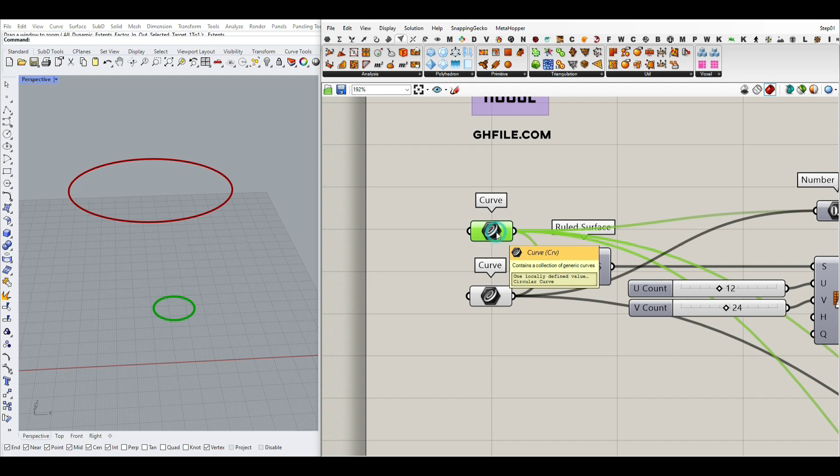To go forward, I've used the surface freeform ruled surface. If I turn this on, you can see that this is going to create a ruled surface.

Now we define the number of divisions that we want, which will give you more detail if you increase the UV division. What you have to do next is define a Kangaroo goal.

I'm going to use Kangaroo main. You can use different solvers, but I'm going to use the bouncy solver here, as you can see, which is going to give you an output.

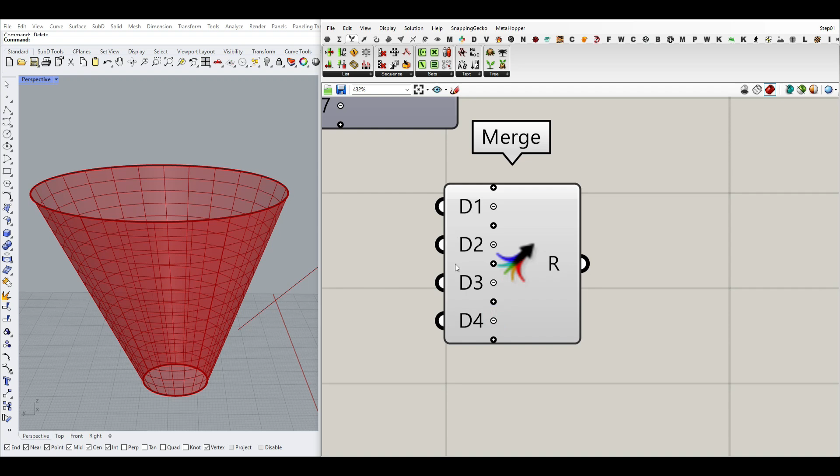We have to define the goals. I've merged all of the goals using a set tree merge. If you zoom in, you can see that you can give different inputs to the merge, and that is a good way of organizing them. So when we give it to the goal object, it's going to be one output.

The first thing I always use in the Kangaroo plugin is the Kangaroo main show. As you can see here, I've used a mesh to show. That is the first goal.

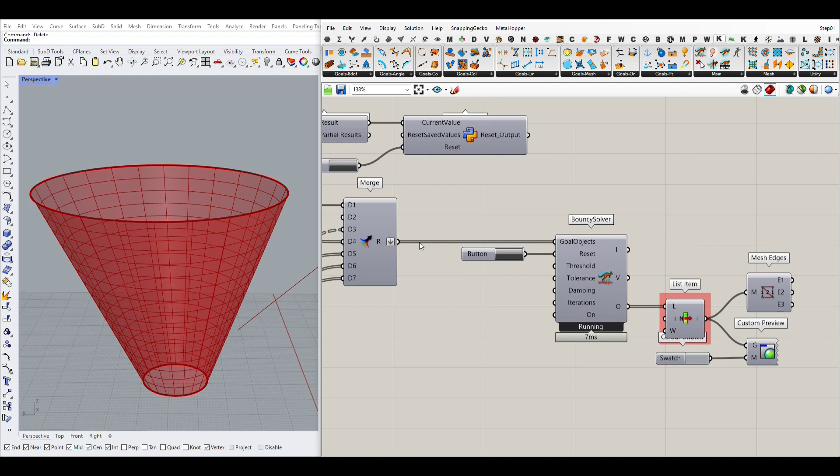The good thing about this is that when you give it to the goal object, the first output is going to be the output you want. As you can see, it's invalid here because we have too much pressure, but we can pick that up with a list item and use that as an output.

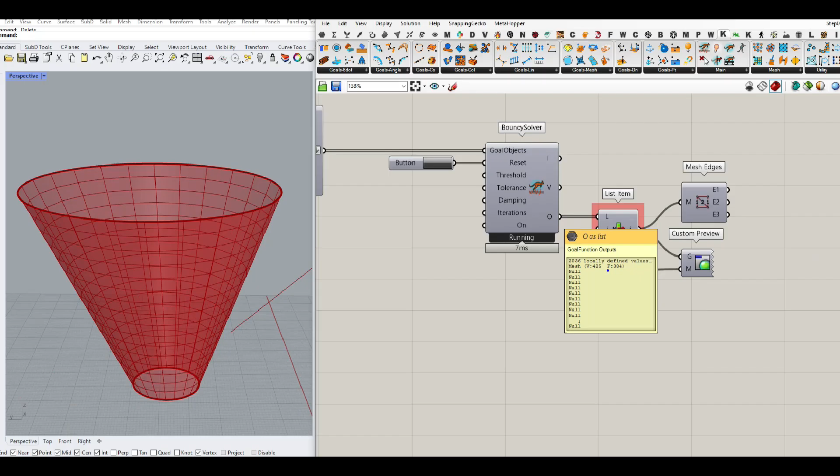Let me put this pressure to 0 and reset the simulation. Here you can see that we will have the mesh, and we can pick it up with this list item. I'm going to turn that off.

If I reset the simulation, you can see the output here. If you want the damping to be a smaller number, you can say, for example, 0.2 to 0.99, and that is going to give you a slower animation.

The number of iterations by default is 10. I'm going to give it a bigger number, for example 40. It's going to make it even faster with a smaller damping. So you can just play around with these numbers.

You can also give a toggle, a Boolean toggle, to control whether we want to run the simulation. If it's false, it's not running; if it's true, it's going to run. A good thing about this is that if you set it to false, it's going to pause the simulation.

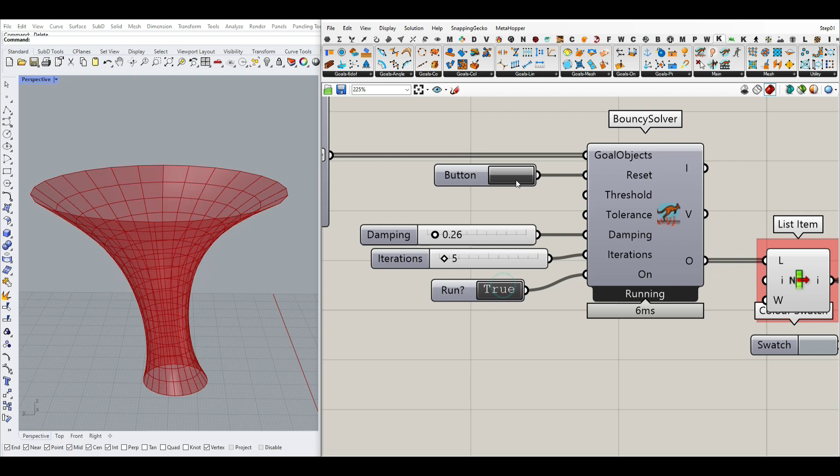Sometimes you can even use that to pick up a particular part. For example, I'm going to run this and pause it for this part. So you can do that whenever you want to get an output.

The next goal we want to define is the goals mesh, and it's going to be a load, for example vertex loads. You can just give the mesh to the input, and as you can see here, I've connected that to the mesh but set display hidden because I wanted to clean up the algorithm. If I give this a minus number, for example minus 0.1...

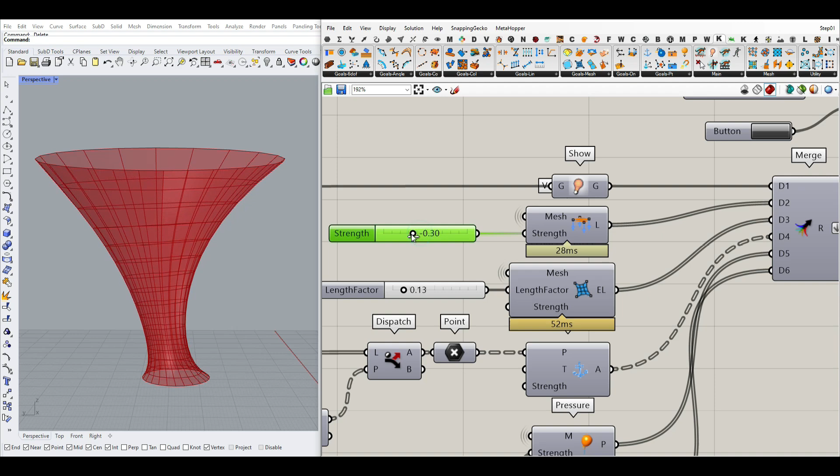...it means it actually has a weight downwards, like minus g. As you can see here, it's pulling downwards. If I increase that, it goes further down. If I give it a positive number, it's going to go up. So you can always play with that number — that is another goal we have defined.

Another thing we have to define is that this is somehow a tensile structure. So I'm going to use the goals mesh edge length, which is going to convert each of the edges of a mesh into a spring-like structure.

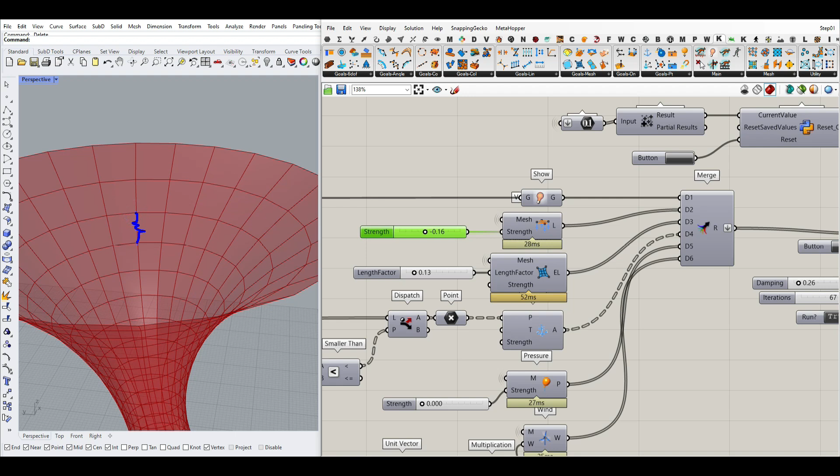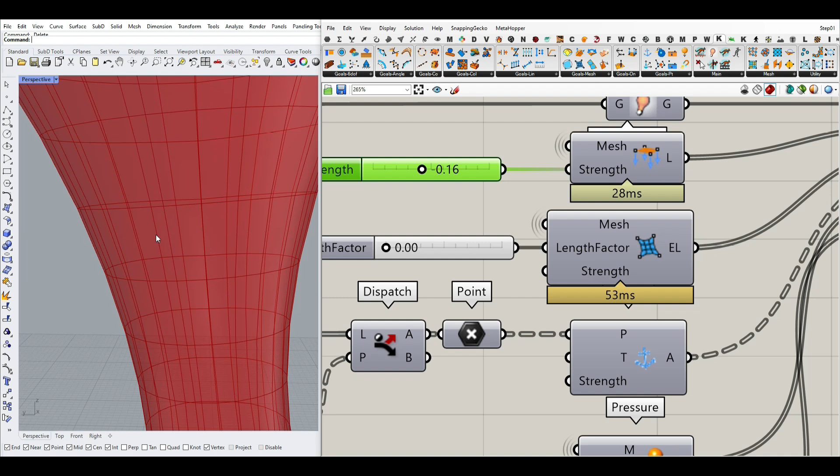Okay, so I'm going to give the mesh to the input. The length factor, you can put that to 0. It's going to actually try to make it as small as possible. 0 means it can reach a 0 length. For example, these can come into a 0 point, but it's going to break the mesh, so this is just like maximum flexibility. If you increase it to 1, it means it can't deform, and as you can see here, it's a little bit awkward as an output. So I'm going to give that also as the third goal.

Okay, the next goal we want to use from the Kangaroo plugin is the goals point anchor, and we want to fix these anchors on the ground. So as you can see here, these points from the top and bottom have to be selected and they're not going to move.

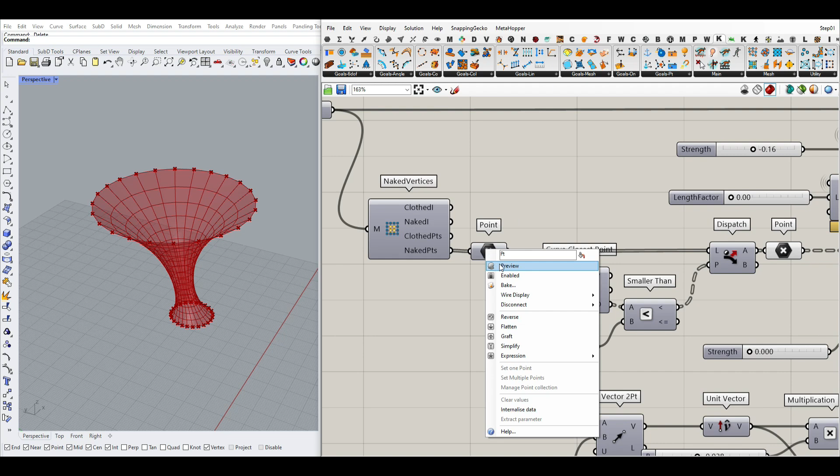Okay, to get those points, you can go to mesh and get the naked vertices of the mesh. It's going to give you naked points. As you can see here, because the surface is a little bit based on the ruled surface, it has a naked edge here, so we have to get rid of the extra points we have here.

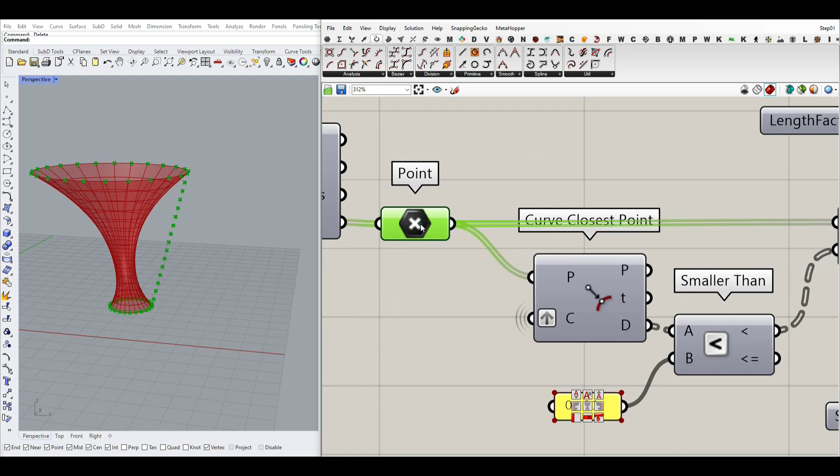What I've done here is curve analyze, and I think that curve CP here we have to use, curve closest points. We say, okay, which of those points are closest to these two curves we have from the top and bottom. I've grafted this - if you don't know about flatten or graft, you have to watch the data management sections from the Parametric course for beginners. We have talked about that.

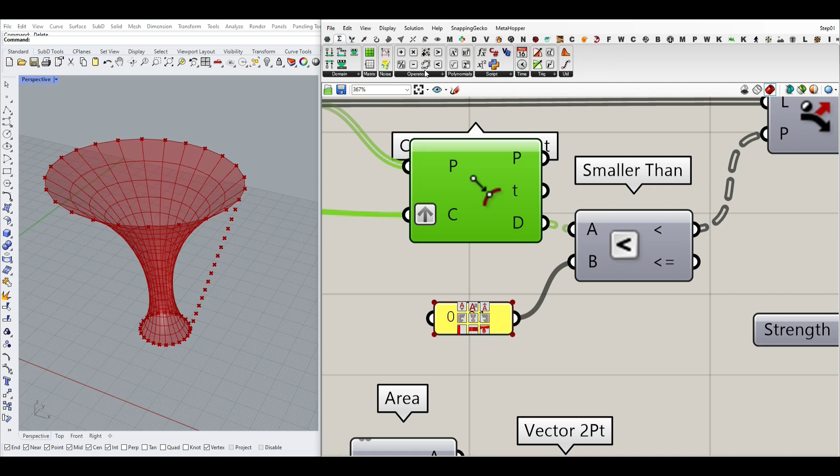And what we have to do here is actually put them into two outputs. As you can see here, for example, this point is going to be projected on the curve at the top, and it has a distance here. And it's also going to be projected towards the bottom. We don't really care about this because we can say, okay, those points that are projected on these curves and the distance is near zero, we want those. And if it's not zero, obviously we don't need that. So you just have to say, okay, is the distance smaller than some small number or something like that?

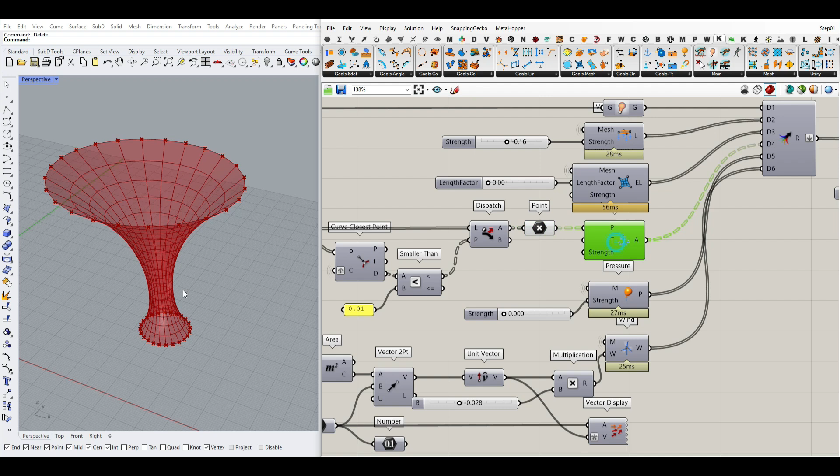Then we can use the set list dispatch to dispatch them into groups of true/false, which is going to be the top and the bottom. And we're going to use that as an output. So that is actually the points we want to fix. We can go to the Kangaroo plugin and say goals point anchor, anchor them on the ground, and give that to the D4. Okay, the next goal we want to do here is actually the pressure.

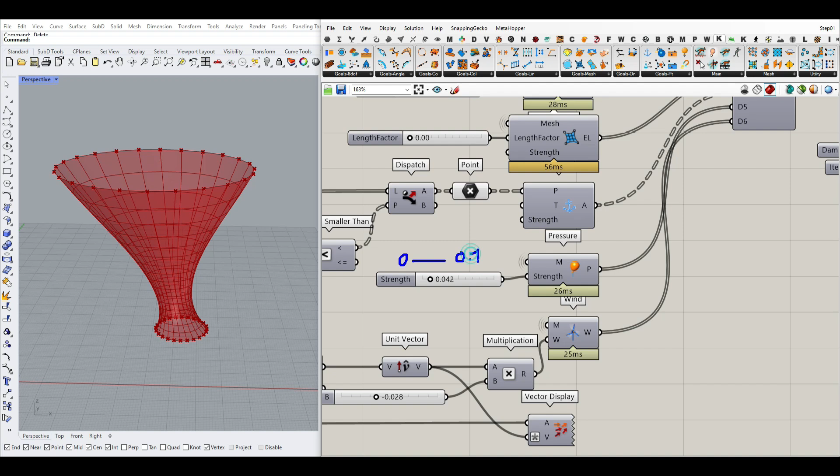Goals mesh pressure, as you can see here. We want to define a pressure, and as I increase this pressure, it's going to inflate it. If you give it a negative number, it's going to go inverse. But remember that this number has to be really small, especially based on your project. I think the safe number is going to be from 0 to maybe a maximum of 0.1. But be careful about this number, don't increase it too much because it's going to break the mesh. So just put that into a small number and get the results.

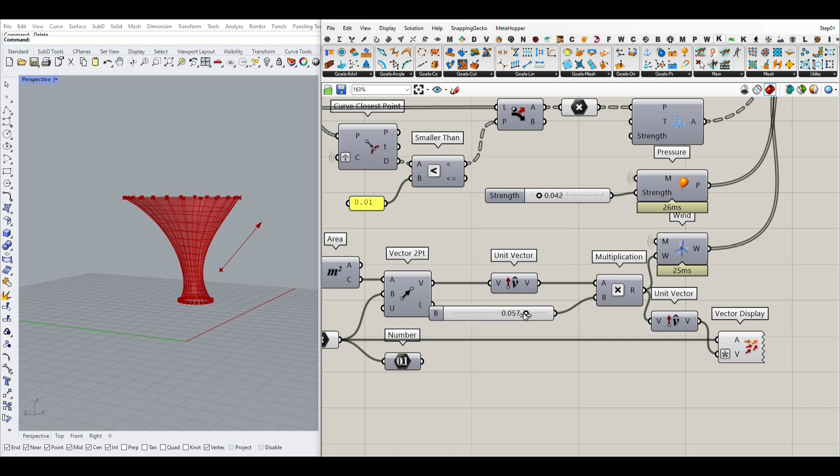Another thing we have added in this example is the goals mesh wind, so I've just added a wind to the mesh here. Because I wanted to define the direction of the wind, I've made a point here. As you can see, when I change the point, it's going to change, and we can go from negative to positive direction. What I have done here is used a point as the point attractor somehow for the direction of the wind. Then I've used the surface area of the bottom circle, bottom curve, which is going to give you the centroid for that, and then I said, okay, the direction is going to be somehow in this direction.

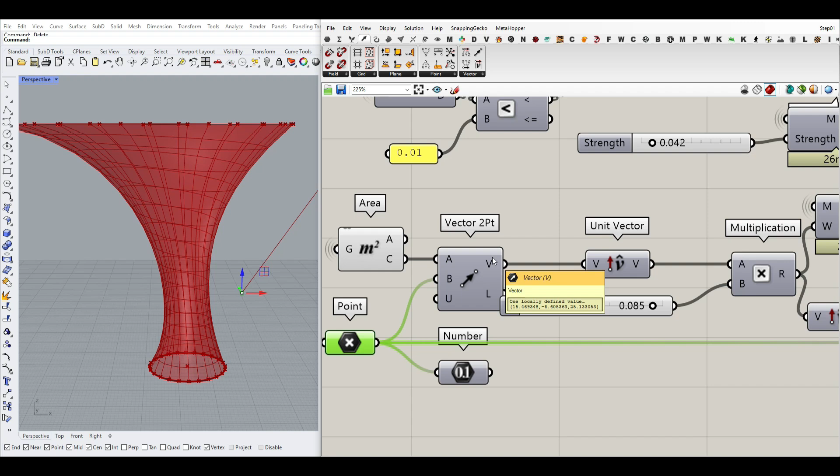So to make that vector, I'll point from this point to this point, and this is going to be the V. Because I wanted to make this controllable, I've used the unit vector to convert that into a unit vector and then multiply that with a number. And then just give that to the W.

Also for the visualization, I again made a unit vector and used display. We will have a vector display here from the point we have, multiplied by the V, like 50 times, just for more visualization.

One of the things I want to explain in this tutorial is that when I change the inputs, I want to reset that automatically. So you can use this Python script. It's just a simple script here by Anders Deleuran, and you can use that in Python.

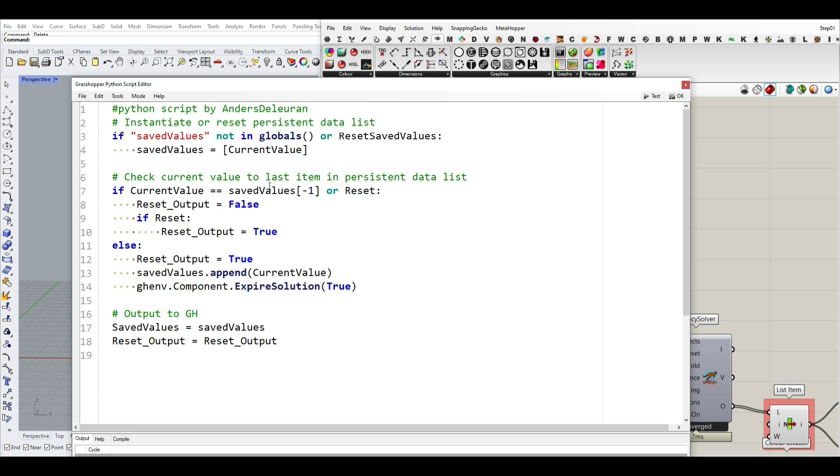When you actually use this code, you just have to give a new value to it, any values you have from your algorithm, and a button for reset, then give that to the reset simulation. So what I want to explain here is how this is going to help you reset everything automatically.

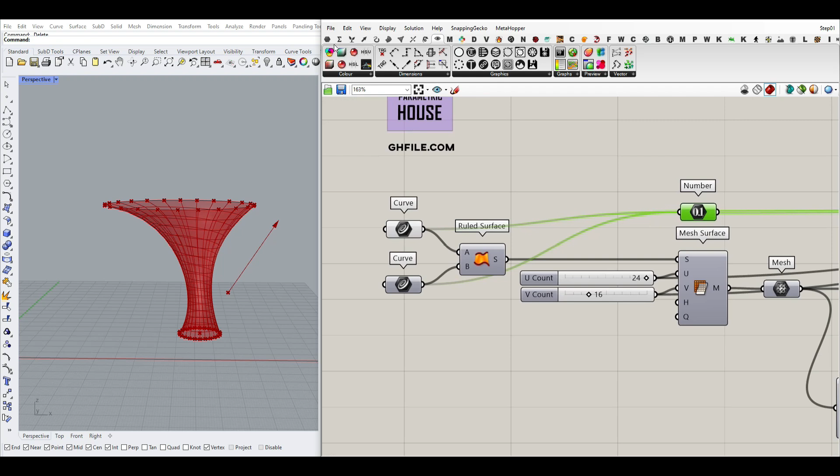So for example, as you can see here, I have added different values. One is from the length - I've connected a number to the curves at the top and bottom here, so that gives you the length of the curves you have. Another thing I have added here is the UV count.

As we change the number of UV count, that's also going to affect the results. Another thing here is the length - I've converted the point attractor into a number.

Actually it's not really important what the number is, but when you change the location of the point attractor, it's going to automatically change the number, so it's going to reset the simulation. I've added all of these to this number flattened.

As you can see here, we are getting some information from our algorithm, which is changing. So after that, what we have to do is go to the math and add them up, mass addition. Let me explain this.

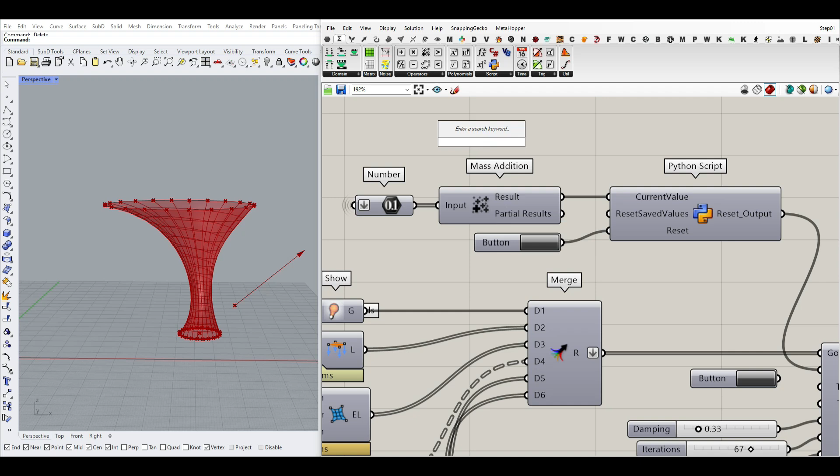What it does, it's going to add all of these numbers up and give you this number. And when you have this number, it's actually going to change each time these values change.

Obviously, this number is going to change, and that is going to trigger this Python script, and it's going to give you a new output. So that is also really useful if you want to have an output.

Also, this button is going to reset the simulation, is somehow something like that. If you connect that here, if I connect to here, let's change this.

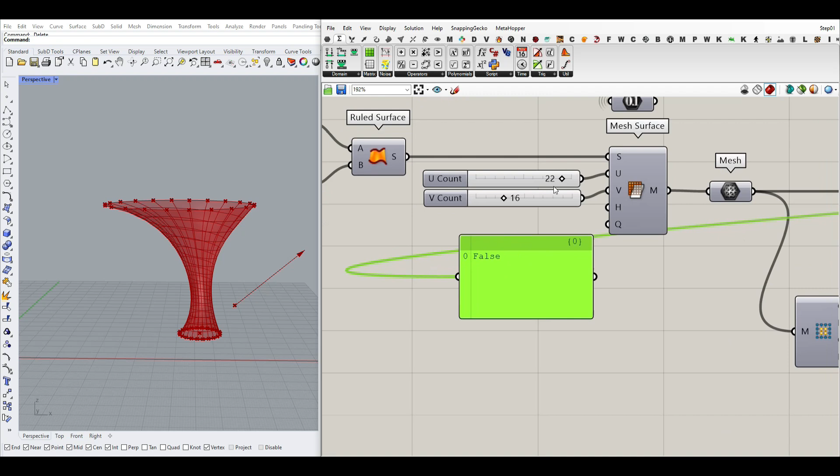For example, I'm changing the UV. As you can see here, it's going to be true and then jump to false. It's going to rerun the simulation. So it's going to be really great.

Maybe we just want something like that, and that is how it's going to reset the simulation. Whenever you, for example, change the location of this curve, it's going to update also.

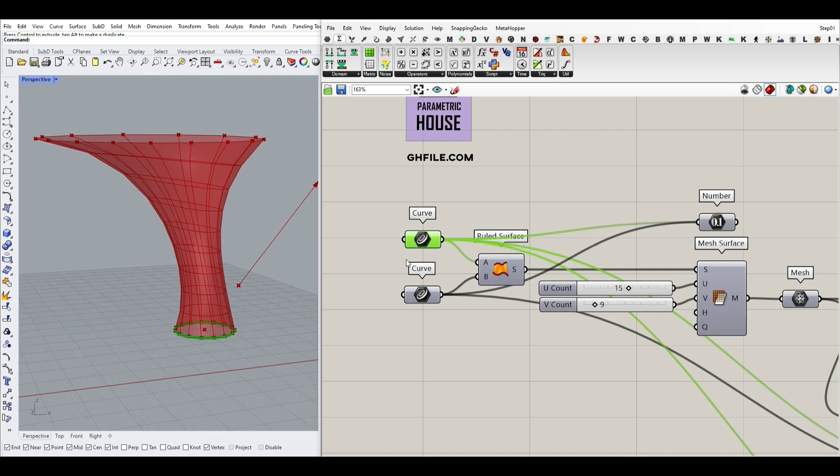Okay, so I'm going to internalize that so you can use it in your project. And I think that's all about the simulation. You can get the outputs as a list item.

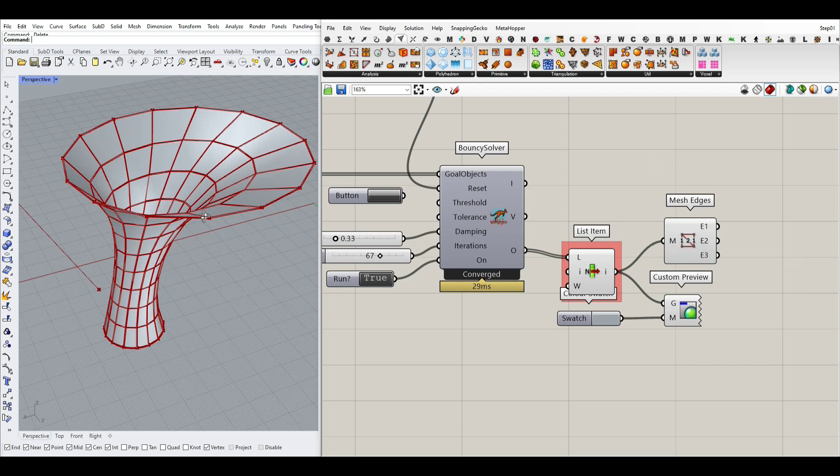I've also connected a mesh edge to see the mesh edges here, and a custom preview just for a custom preview of the mesh and also mesh edges. That's all we want. As you can see here, we can rerun the simulation and change things easily.